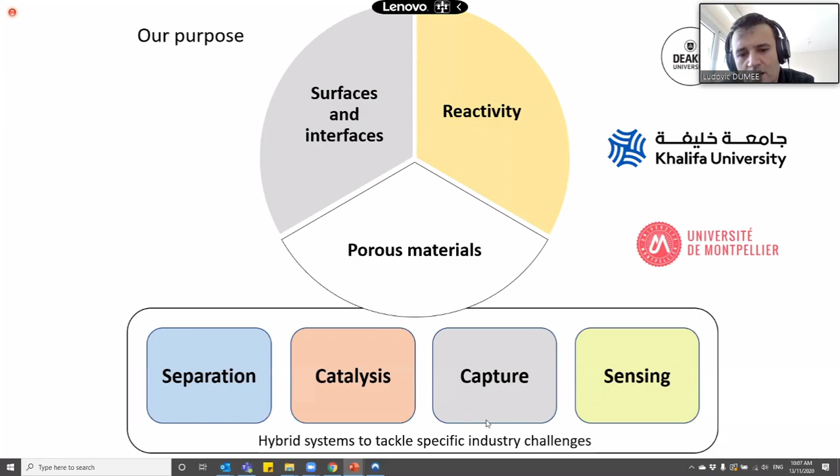where we can really engineer the architecture of these materials from a top-down type approach. In terms of specific type of materials or application, I'm not focused on anything in particular, because I typically go for a challenge, whatever it is, and try to find the best couple in terms of process and material to solve that challenge. But most of what we've been doing so far was in separation, membrane, and adsorption, catalysis, capture, for instance CO2, and a bit of sensing as well.

Recently, I have 3 different themes in Australia, and those are the 3 I'm going to continue in Abu Dhabi: healthcare materials, looking at cell sorting, hemodialysis, and microdialysis to extract specific markers in the brain; environment, where I'm going to show some stuff today mostly on nano and microplastics, as well as resource recovery; and obviously the material aspect, which I mentioned before.

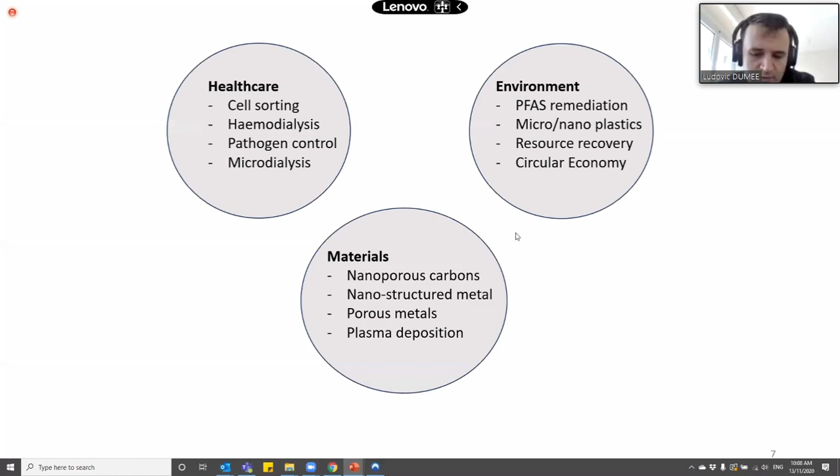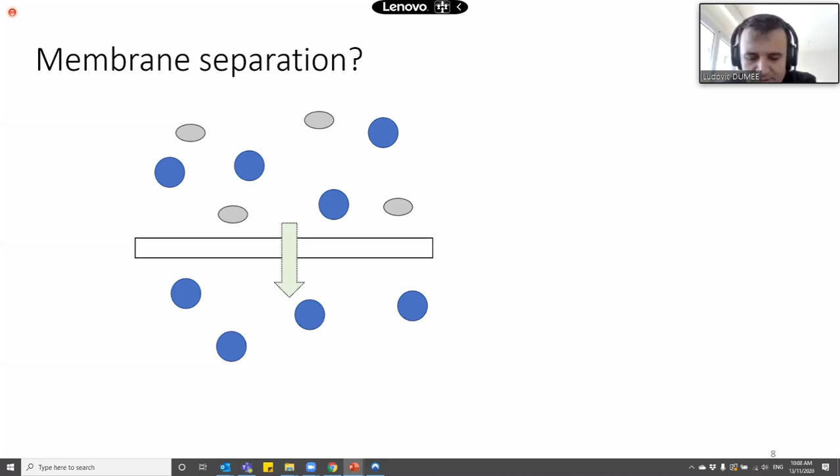Obviously, most of what I'm going to show you today is on membrane separation, so I want to make sure we all have a bit of understanding there, and I'm sure you are familiar with it, but just in case: a membrane, in fact, is nothing more than a filter. It has the ability to separate specific contaminants or resources or solvents from each other.

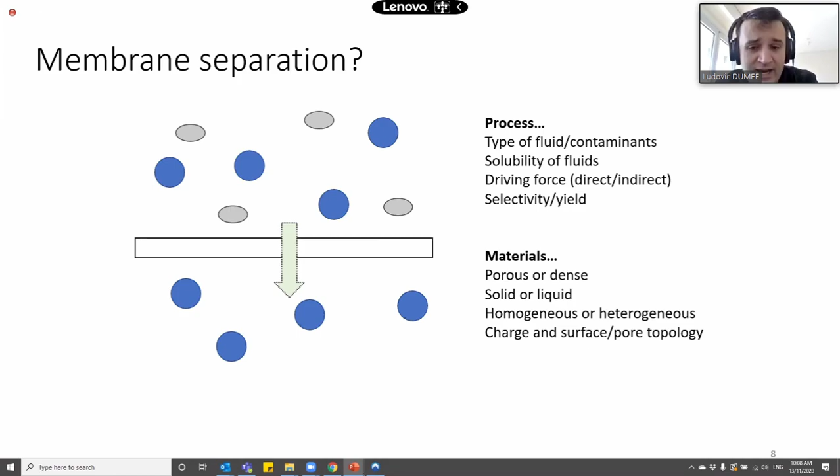And we have a number of different driving forces which will be applied across the membrane. These would actually dictate the selectivity, the permeability or permeance of specific compounds, and the yield of the reaction or the yield of the separation.

The materials that we can use to make such membranes, to engineer them, can be porous or dense, like I will show you today. They can be solid or liquid as well, and be made of a fairly homogeneous material, like a single polymer or a single metal oxide maybe, or it can be heterogeneous, like a composite material.

And again, you can imagine here, when you have such interaction between nanoscale molecules or mesoscale molecules and materials, you really want to control the topology of a membrane, the topology of the pores as well, in order to be able to engineer the interactions, in terms of charge and repulsions, between those contaminants and those surfaces.

So most of our work, again, is only on surface chemistry at the end of the day. We try to make holes in stuff in a controlled manner, and we try to make sure that we understand what surface energy we have on these surfaces.

These are probably the 6 main membrane separation processes which are available either commercially or at lab scale, depending. Reverse osmosis is the main one for desalination nowadays from seawater. Forward osmosis has found a number of applications as well in terms of industrial wastewater treatment, dairy, food, and so on. Membrane distillation is a very good technology, though it requires you to heat up the water in that case.

And the classical pretreatment systems like NF (nanofiltration), UF (ultrafiltration), and MF (microfiltration) are used currently in a very routine manner across a number of separation processes, from wastewater to healthcare to also pretreatment of chemicals, for instance. But really, these technologies are the core ones which we can find for desalination purposes, and they are very good.

But all of those only allow water or solvents to go through, in a sense. You will have some of the ions, some of the contaminants crossing at the same time, but they are more or less designed to allow for liquid permeation. And that's not always what you want. The two other technologies which actually allow you to capture contaminants directly or to capture ions are electrodialysis and capacitive deionization.

These two work based on the charge of a specific material, which has to be conductive in essence, and/or at least which can be either charged directly or which can allow for transfer or adsorption of specific ions. These will actually target those ions and not the water or the solvent. So we have a bit of a dichotomy between these two classes of membrane separation technologies.

Today I'm going to talk about UF for the microplastics and electrodialysis for the cobalt and lithium recovery.

Without getting into too much detail, obviously all of these technologies have a number of challenges and limitations, both from a process point of view, and some are inherent to the process, like fouling or scaling. You cannot do much about it. It has to happen because you concentrate something, and therefore you increase the stochastic chances to have specific adsorption and therefore strong adsorption between these contaminants and the membranes.

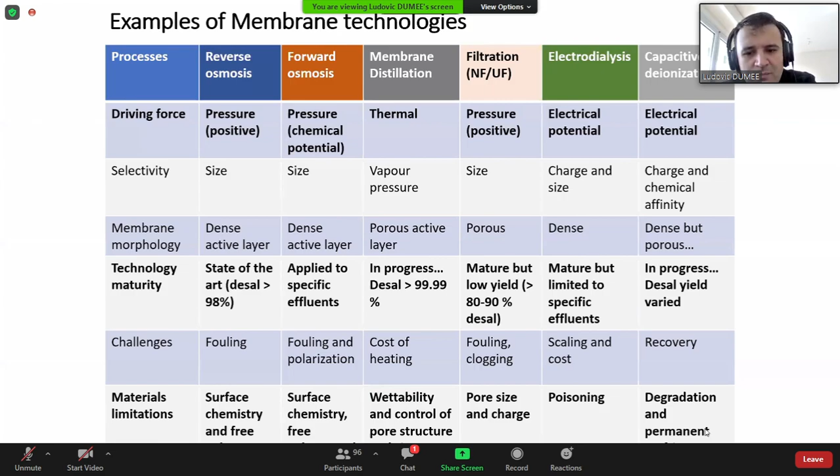So I guess this table highlights that these technologies are, most of them, very well matured. They are commercial, but they're not perfect. There are a number of applications that have been developed where things are well understood, but for a number of emerging applications with emerging contaminants, we need and require better materials and combinatorial processes to tackle those.

So what we have been doing for the last 8 or 9 years now is develop catalytic or responsive membrane reactors, which allow you to treat selectively some contaminants in that solution, or to degrade them, or to selectively capture them from a complex bath or complex mixture. We have been looking at biocatalytic membrane reactors, electro, photo, Fenton, and hybrids of those.

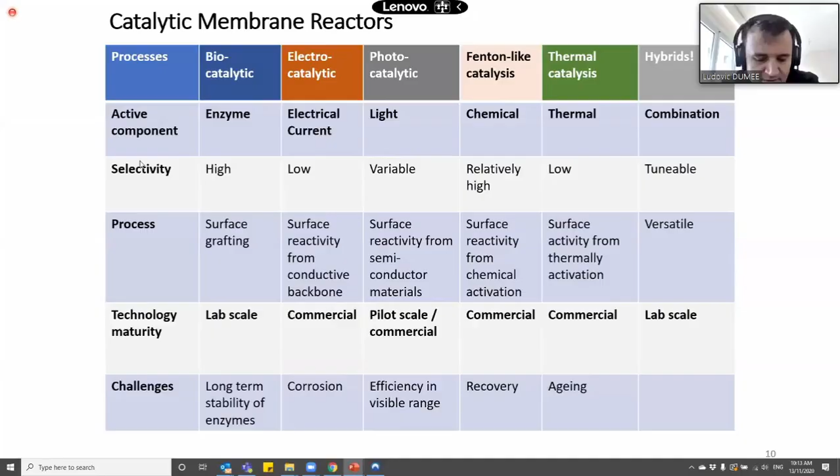The idea is that if we have a blend of ions, lithium, cobalt, and others, like I will show today, we can manage to force some of these through at very, very high selectivity. Because recovering water is always valuable, but there are often more valuable compounds in water.

At least with the concept of circular economy I'm trying to promote, I believe we should pursue managing these effluents in a much smarter way to achieve a zero liquid discharge type process, meaning we have an effluent coming in, we get the water out, and we get a number of products of value out of the brines being generated.

And if we can achieve this, that will not only reduce the cost of desalination, it will also reduce the environmental impact of these brines, which are currently released either in oceans or in sedimentation and evaporation ponds.

So it's trying to look at those processes I just showed before in a much more circular way and in a much more environmentally friendly way.

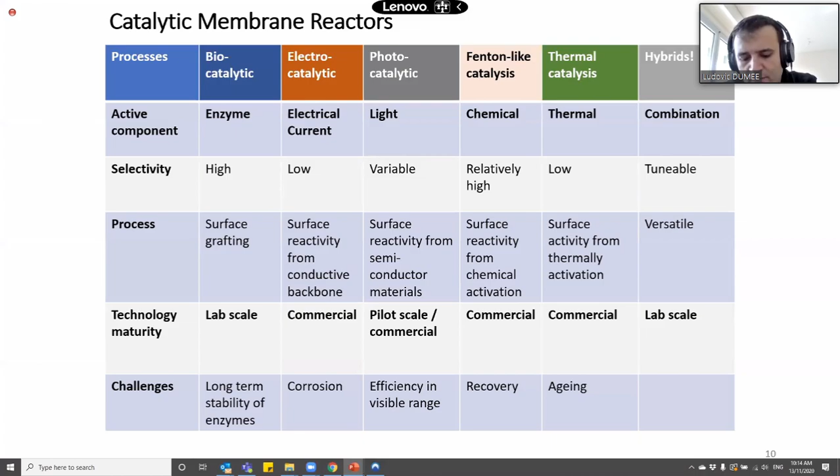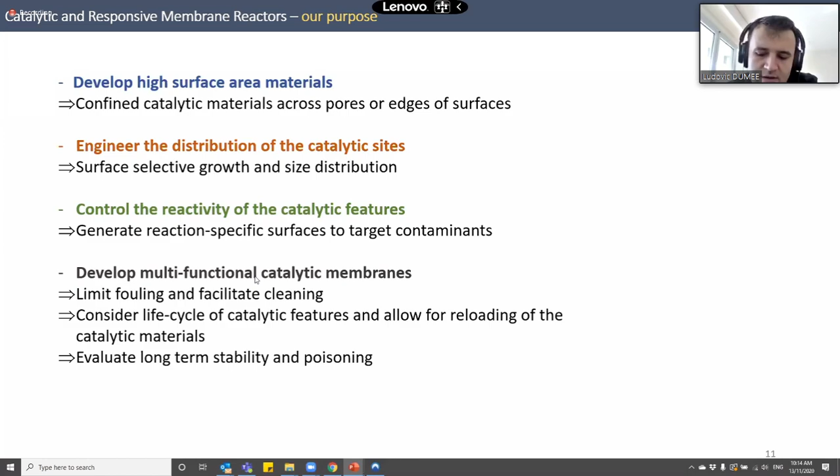Without getting into details, obviously we have been focusing on controlling materials properties in those contexts to limit fouling, to facilitate absorption, etc. I have probably 6 or 7 examples I could show you, but we'll just be focusing on 2 today.

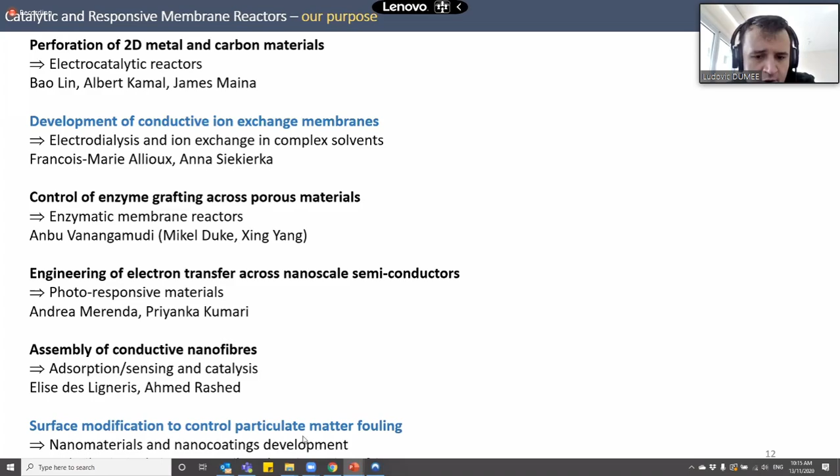The first will be the development of conductive ion exchange membranes for electrodialysis by tuning the properties of these membranes. The second is on the surface modification of ultrafiltration membranes to control particulate matter, microplastics, and fouling.

This work was really done on the battery spent effluent recovery by Anna, one of my postdocs. She's now back to Poland because of COVID again, but she left us in August, and she has been working with us for about a year, a bit more than a year, on that project.

The objective of this project was to see if we could develop again a membrane-based technology to extract selectively some of these compounds in the battery spent effluent.

Looking initially, because we have to make it economical, at lithium, which has a high value.

Sorry, there's a bit of background noise. Not sure if the mic is open.

And it is also extremely finite, so it's close to being one of these rare earth elements in those systems. We have to make sure we don't waste it, and we must be able to recycle and put it back into the loop. Besides the membrane aspect, I will show you some work we've been doing on using mixed solvent extraction at the same time as membrane separation to facilitate the kinetics of diffusion and the precipitation of these ions.

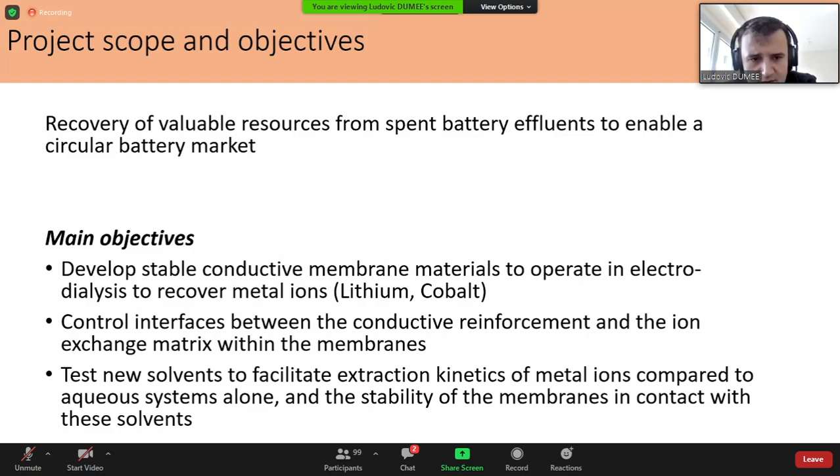So a bit of background there. This is for Australia, and I should get better numbers for globally or for Indonesia. If you look at the graph on the left-hand side, these are projections for the amount of waste of lithium-ion batteries in Australia, with three scenarios: low, best, and high level. Regardless where we stand, we're around 2020 right now, and we have about 10,000 tons, maybe 8,000 tons of waste per annum. But in 10 years' time, by 2030 or 2031, we'll have nearly quadrupled this, and it goes exponential afterwards.

Of course, this will depend on the development of new technologies, especially solid state batteries, which are happening. But even if those technologies come in, the amount of batteries, the volumes, and their capacities will increase as well, which means they will require more lithium, more cobalt, and more of these finite resources.

The cost of cobalt is on the order of $28,500 per ton at the moment, so it's quite valuable. In a battery like those, lithium ion, you can have between 0.1 to 1 to 8% maximum in the spent solution of cobalt. But if you look at those millions of tons globally of batteries being used, this still represents a large amount. Here it gives you an idea of a different share of compositions for the different main batteries, and you can see not all of those will include cobalt, but there is quite a proportion where there's a need to make sure we recover these elements.

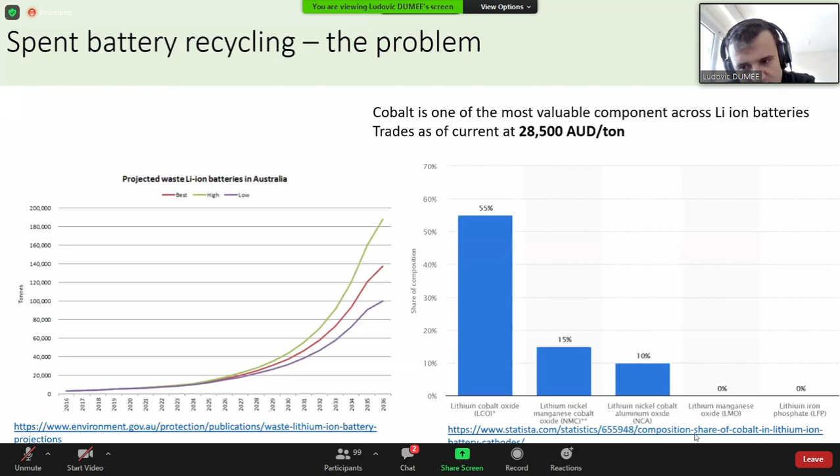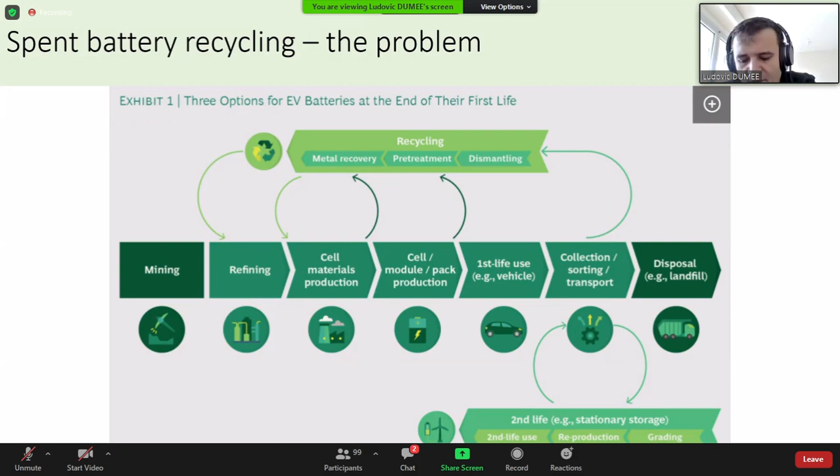There's a link at the bottom there if you're interested. That's a very good blog on resource recovery, focused for that article on batteries. I do recommend you have a look here. This article presents the different sources of components used to develop the batteries, and you can see if we want to make it circular, what kind of looping is needed right now to manage second life recovery of these products. I think it's really something we must strive for.

This shows you a bit of an economy of scale for recycling in China, a fairly recent piece from the same blog paper, published in July or August 2020. That gives you an idea of the total revenue expected, normalized by the energy cost, and also what can be done in terms of gross margin and direct margin.

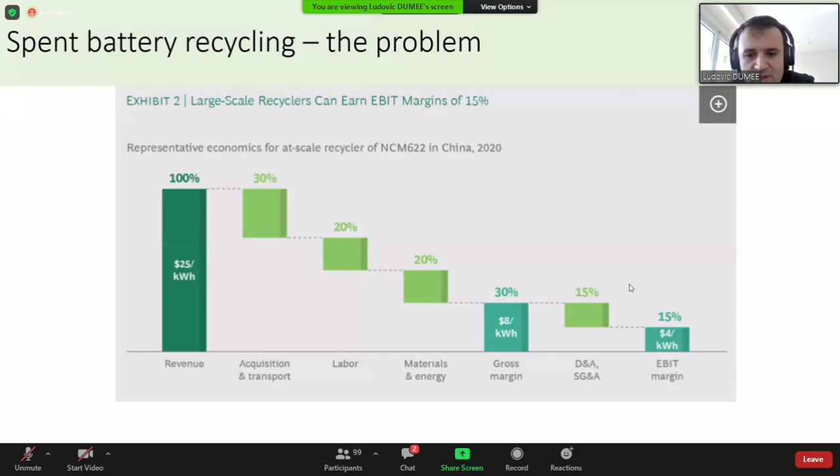I think it's important to realize the breakdown of these components across the board, because the labor component is not the major one here, which is often a reason why recycling is not done—most of these technologies currently made to recycle batteries don't require so much labor. The major part of the labor is required for the dismantling of the battery, not really for the operation afterwards. So all the rest is really operational costs from a process point of view, and these can be leveraged and reduced if you have an economy of scale happening.

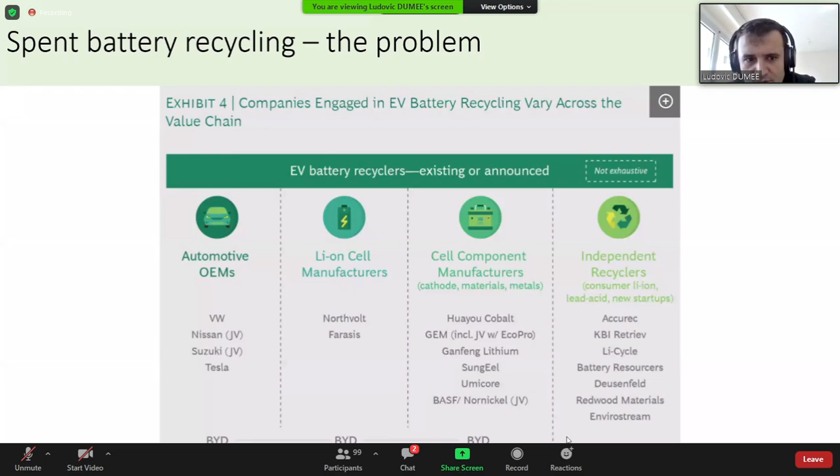You have a number of membranes with spacers between them to generate channels. Once these membranes, which come in couples with anion and cation exchange membranes, are stacked, you put them between electrodes, then apply a difference of voltage which drives a current, electron diffusion across the membrane stack, and therefore diffusion of ions from one side of a membrane to the other, if the membrane allows for that hopping mechanism of diffusion.

This has been demonstrated for desalination of groundwater, seawater, etc. But I wanted to understand how we could use that for lithium, cobalt, and other similar ions.

One thing that's pretty obvious is that these membranes have to be dense, because we don't want water diffusion directly. We want ion diffusion, often with a shell of ions around them, but it has to be limited to those hydrated ions.

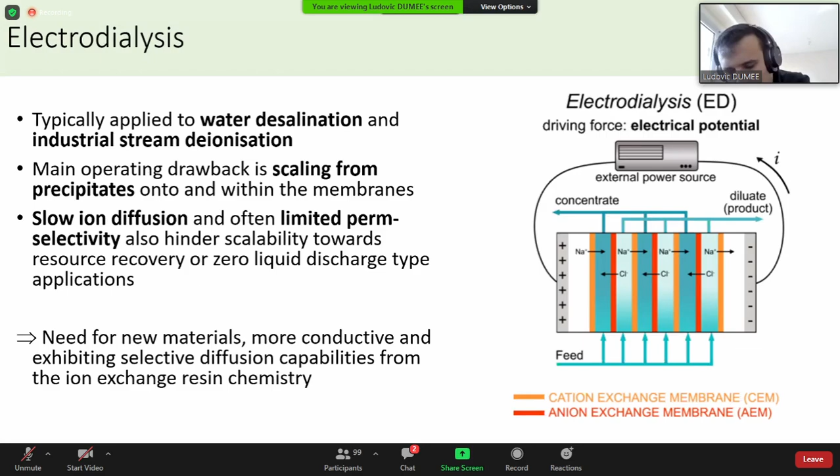So here, Anya really looked at two different strategies. On the left-hand side, she looked at the development of monovalent selective cation exchange membranes, because we only look at cation here due to the lithium and cobalt.

She tried to understand how we could look at partial dehydration of these ions, depending on the cation exchange models used. In a sense, what we wanted to understand is if we have pure water solutions or a mixed solvent, how that affects the hydration shell, and how that affects the diffusion potentially from the diluate to the concentrate side.

The second strategy she looked at is to develop cobalt selective membranes by a specific polymerization process between PVC, which is a typical base to make membranes because it's quite solvent resistant and stable.

And by actually looking at compounds called 5-chloro-8-hydroxyquinoline, which have been shown - because of the interaction between that OH and the tertiary amine functional group - to facilitate the encapsulation of cobalt ions. That was published by another group recently, a couple of years ago.

The idea was that they demonstrated it could be very selective for specific compounds.

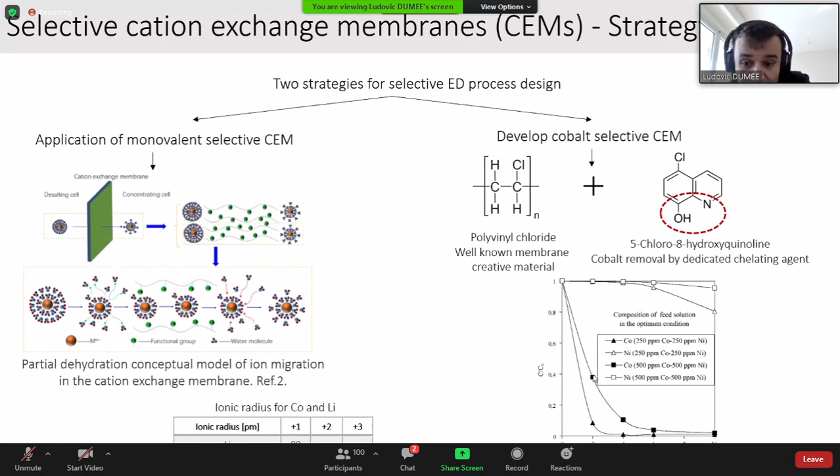So first, like I mentioned at the start, we try to control the morphology of membranes, we try to control the surface area often, and also the density, because we want them to be very dense.

Anya started from commercial membranes, Neosepta from Japan, and also made her own membranes, trying to control the surface morphology to facilitate diffusion and also to facilitate uptake.

Most of the time you want to limit the surface area of a membrane because you want to limit fouling - that's true for NF, RO, UF, MF type technologies. But in electrodialysis, you actually want to try to get more surface area to facilitate a higher diffusion rate.

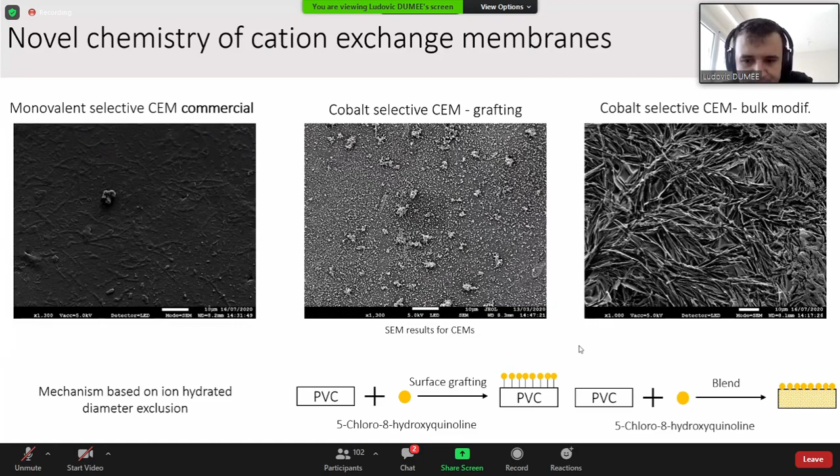This is important because to facilitate the diffusion of these cations, we want to have a membrane as negatively charged as we can, to some extent.

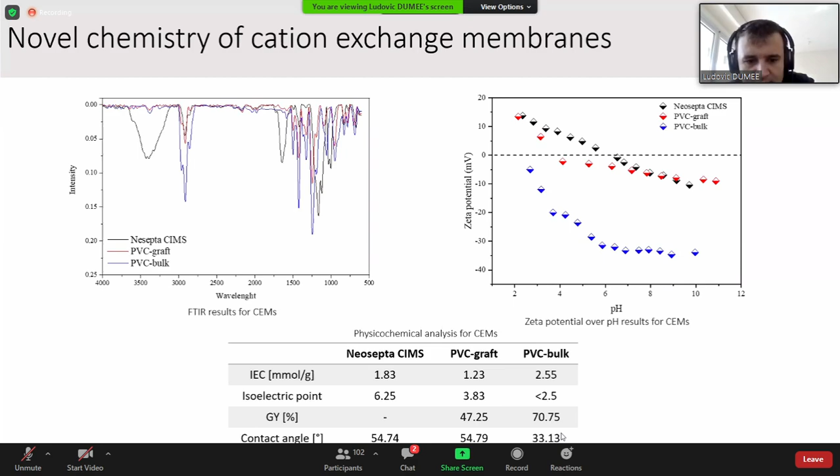So she made those modules and looked at the diffusion of different solvents, pure water in some cases, or with a deep eutectic solvent, the DES solvent I will show you afterwards. But the concept was the same otherwise. And she developed some membranes which were lithium selective, I didn't show you the chemistry, but it was done, and others which were cobalt selective.

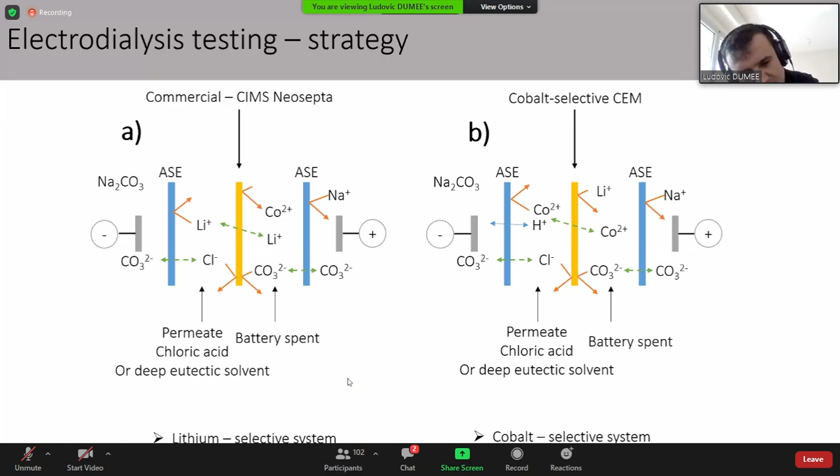That's interesting because this comes at the cost of the flux, if you look at the flux of lithium compared to cobalt. The interesting point is that by controlling the surface properties of the materials, you can definitely improve by a great extent the selectivity of these things.

If we really want to recover cobalt, such strategies can allow us to do so at a fairly cost-effective level, because the voltage across those stacks, with membranes about 50 millimeters by 50 millimeters, quite small, is quite limited—only 5 volts. In other processes used industrially, they have to go to much higher voltages to control the selectivity from the driving force, which we didn't have to do.

The second thing she did, or tried, was to look at these deep eutectic solvents. The idea here was to change the properties not only of the membranes anymore, but of the solution, to see if on the dilute side or the concentrate side we could manage to alter the solubility of the ions and also alter their ability later to precipitate selectively.

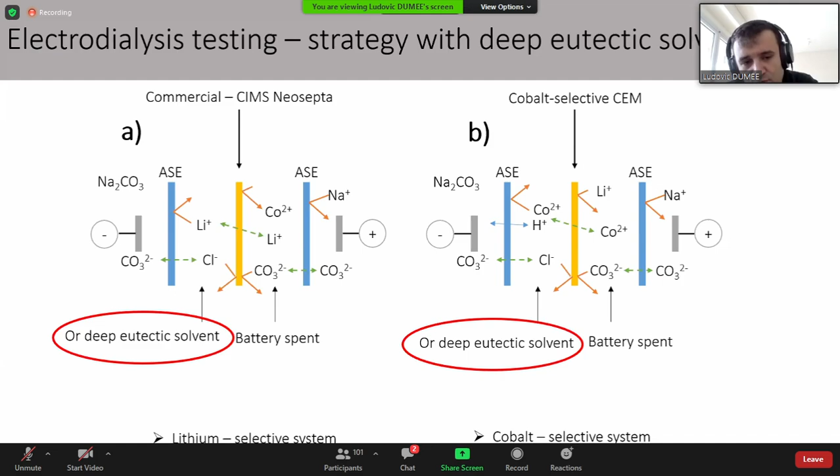She used a mixture of choline and urea, which is a known mixture actually used in carbon capture, CO2 capture mostly, and tried to understand the diffusion rates, the kinetics here for lithium and cobalt across the different systems at different concentrations.

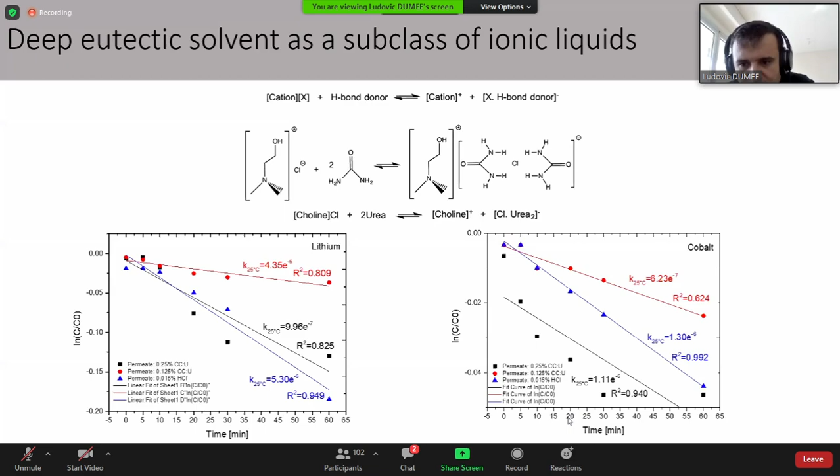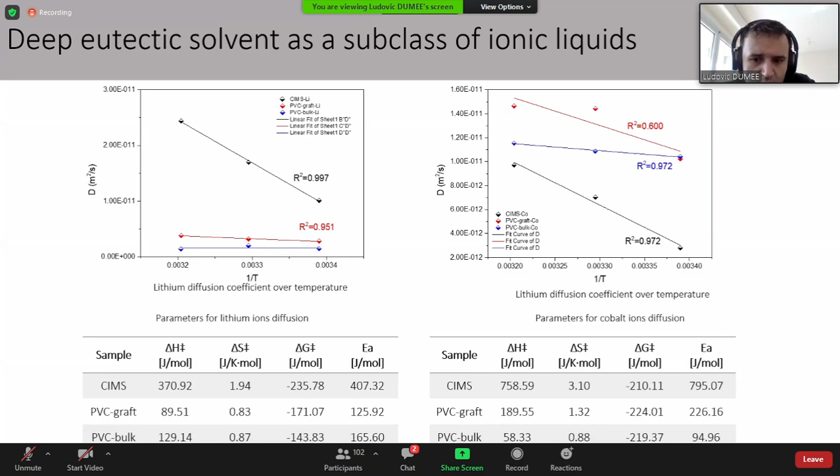If you look at these DES solvents as a subclass of ionic liquids, because people are looking a lot at selective extraction with ionic liquids, but they are very expensive and can have toxicity issues, the DES are much more stable, much less toxic, and can allow us, as you can see here, to capture much more of these ions compared to the reference water solution.

So she performed more tests with the same membranes and with mixtures of DES and water, and she managed to further increase the permselectivity for the PVC grafted membranes. She nearly doubled them compared to what she had before.

Generally speaking, even for the reference membrane, it looks like the impact of the solvent was beneficial to the diffusion, and the solvent actually favored the desorption of cobalt from the membrane, because we have nearly a factor of 5 here, and here a factor of 2.

This is not true for the PVC bulk though. You can see we have less than we had before, because we had around 26. That's likely related to the fact that the PVC bulk modified, which had more monomer in it, had a greater uptake of the DES solvent.

So the diffusivity of the solvent was too good in the membrane here, and over here, it could not diffuse far, just at the interface. Here, the membrane captured the solvent, which prevented diffusion of the ions.

This paper was submitted a few weeks ago, but if you have questions or are interested, we can further discuss.

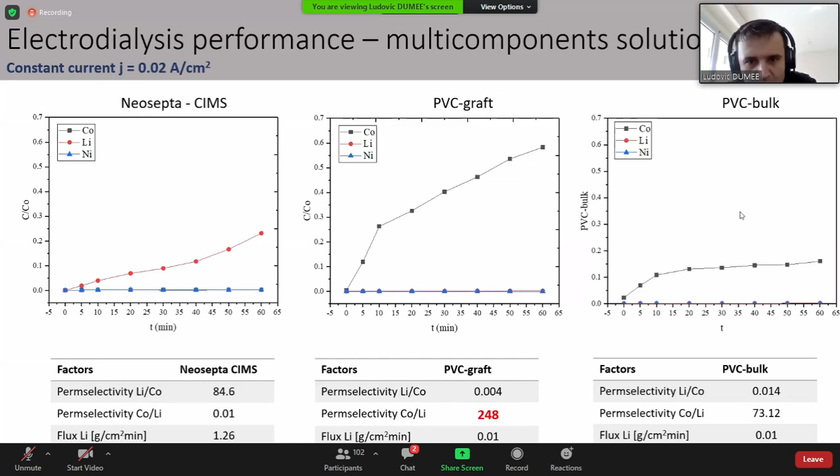And this graph actually relates to that directly. That's looking now at constant currents as opposed to constant voltage, but we had similar permeation and similar behaviors. So I won't go into this, but in a sense, those PVC grafted with the monomer grafted on the surface were always better compared to the others.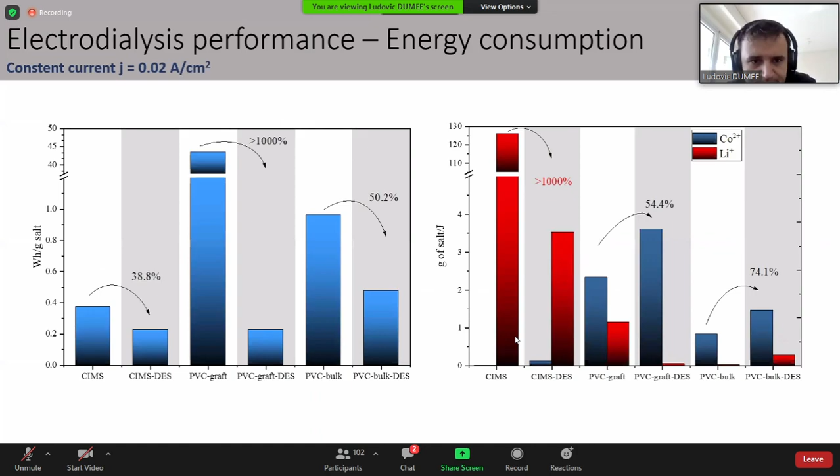And she made similar calculations there.

So in conclusion for this first part, what I want to say is that there is a lot of work to be done on the material side to further improve these concepts, and that if we want to be selective, if we want to have highly efficient systems, we need to rethink the way we do things, because often people want to be fast and have great selectivity, and that's not always possible.

Now we are touching limits of thermodynamics, and also if you have fast flux of different components, it often leads to more fouling, to more detrimental effects on your materials and on your membranes. So I think we have to accept the fact that we need to be slow for some things, but we need to be able to do it extremely selectively.

And if we do so, like I showed you for some of these examples, the economics follow. So there is great potential to pursue that circular economy aspect, not by always trying to be efficient, but in the sense that we need to be selective to get a product nearly pure out of a single process.

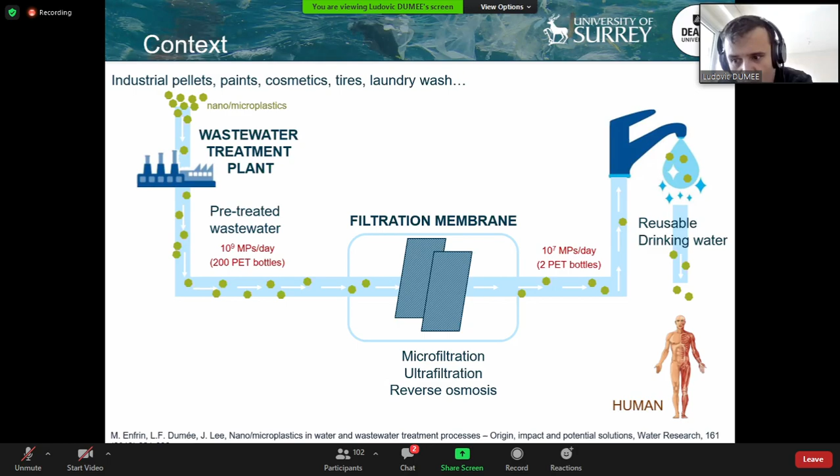Would they not do anything at all? Would they increase fouling, or would they damage the membranes, for instance? So we looked at a number of things, focusing on one single type of membrane, and how we could modify it to control the surface charge.

That's always my approach: to understand, if fouling occurred, what we could expect. Typically we expect lower flux and higher rejection, but also a shorter lifespan of the membranes. And if we have to clean them, that further reduces membrane lifespan. So we get into a vicious cycle of keeping performance high in terms of flux but losing material integrity, and increasing operating costs at the same time.

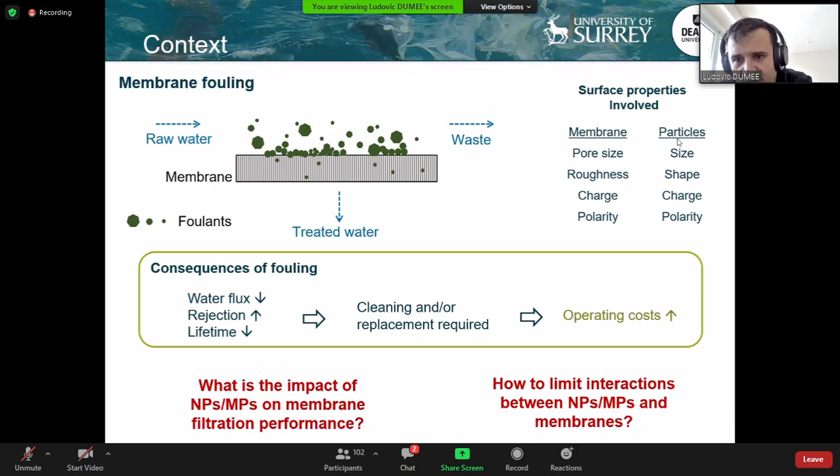So we wanted to understand if we change the shape, size, charge, or polarity of the particles, how that would affect patterns based on the membrane properties. I'll show you two things today.

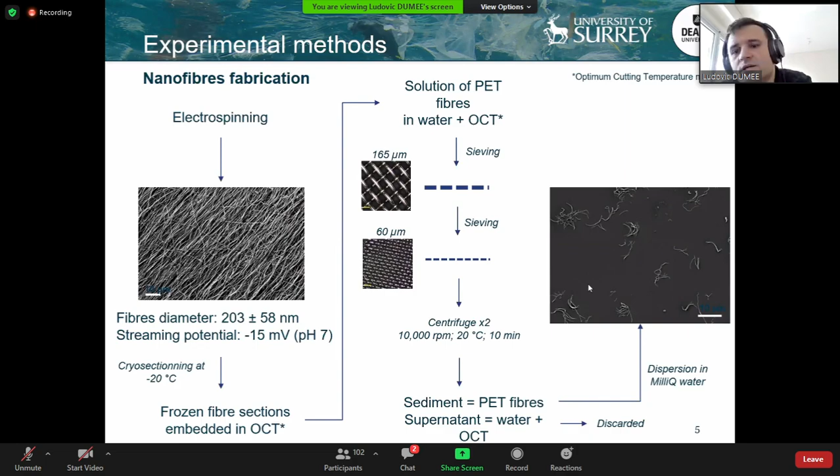The first is how we synthesized short nanofibers. We used electrospinning to make aligned, or fairly aligned, fibers, with a diameter around 200 nanometers and a length of roughly 5 microns. After a specific set of treatments, we looked at how we could isolate them to use as a feedstock for our filtration processes.

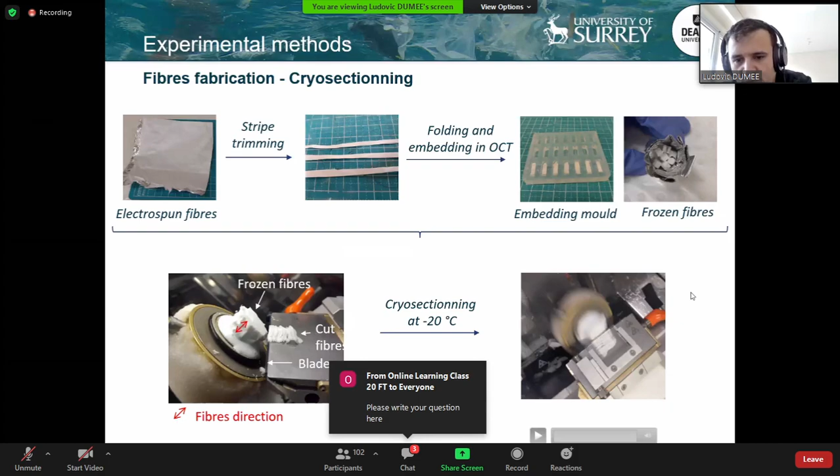That's, in a sense, how she made it. I won't go into the details, but she spun the fibers, cut them, used a material to freeze them, and then cut them down with a microtome to get very thin slices. The video of that process is too noisy to show here. We also had to characterize these fibers to understand if we could remove the freezing material, and to determine the concentration and levels we had in solution.

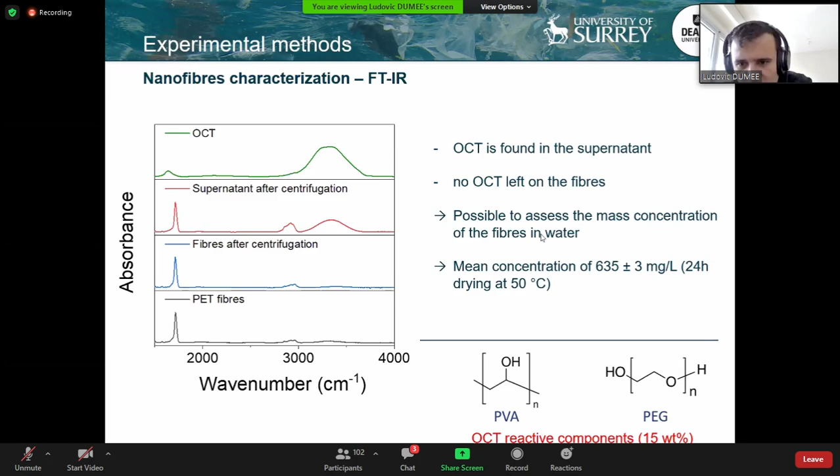So the first material we synthesized ourselves. The second material we used is actually microplastics from a face scrub, which is no longer for sale. But when Marie started her PhD four years back, you could buy it off the shelf in the UK. It came from one of the major supermarket brands, and she bought ten of them, which was enough for her whole PhD.

In those face scrubs, up to 2.5% was plastic—a massive amount when you think of the tons, or megatons, that have been sold to people over time. Some of the microplastics we found ranged in size from 10 nanometers to 700. I really wonder what happens when you're below 100 nanometers, in terms of uptake by cells, by the skin, and so on. This is a health issue.

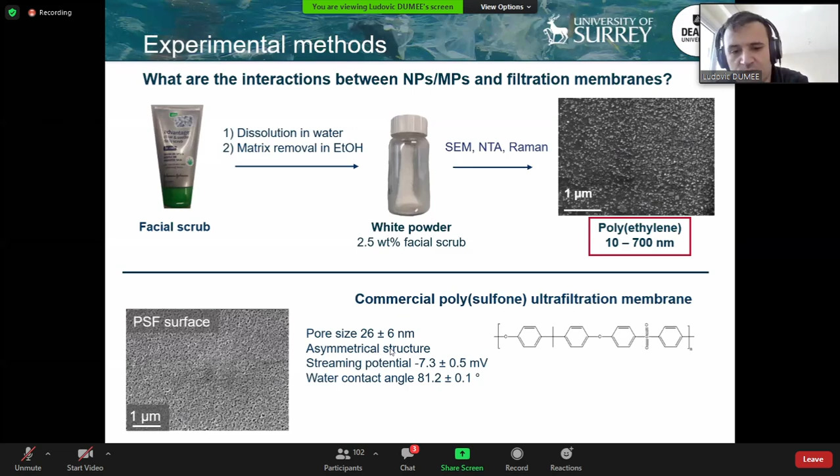The pressure differences here were quite low. We were around, I think, 1 or 1.5 bars, so not high transmembrane pressure, and the impact at those concentrations, which could be arguable, but is yet quite dramatic.

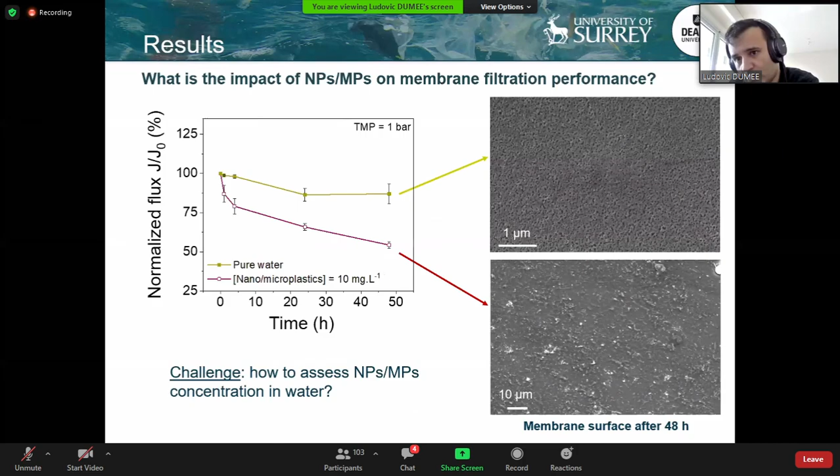But how do we go from seeing that on the surface to understanding how much particles are on the surface, or are still in the liquid, in the effluent, after crossing the membrane?

So we use the technology called the nanoparticle tracking analyzer, NTA, which is fairly recent. The first units were commercialized about 10 years ago. And it works a bit like DLS, except that the algorithm is quite different.

There is a laser scanning a microfluidic chip, which we have a cross-section here, and it will scatter light around those particles. The scattered rings of light around the particles will allow you to determine, with the right algorithm, the particle size distribution.

The software is pretty smart here because it will take a video of whatever goes through that microfluidic chip as the particles circulate, and it will track each particle individually to make sure it's not counting them several times. That's important because it allows us to get size and number distributions of the same sample.

The main challenge here is that it has to be fairly concentrated. We need at least 10 to the 6 particles per milliliter to work, so that's a challenge. The second challenge is that this is good for nanoparticles up to a micron. It doesn't work for anything larger.

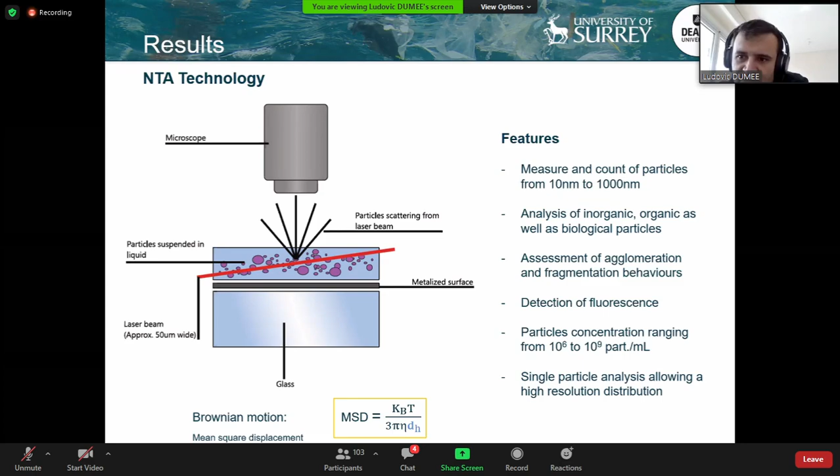But like I said at the start, most of the work to date has been done on microparticles, not on nanoparticles. So by doing so here, and because of the range of particles we saw, it was still relevant for our study. When Mary prepared the fibers or the particles, she made sure she had nothing larger than a micron in terms of particle size, by having a prefiltration step to only consider those nanoplastics.

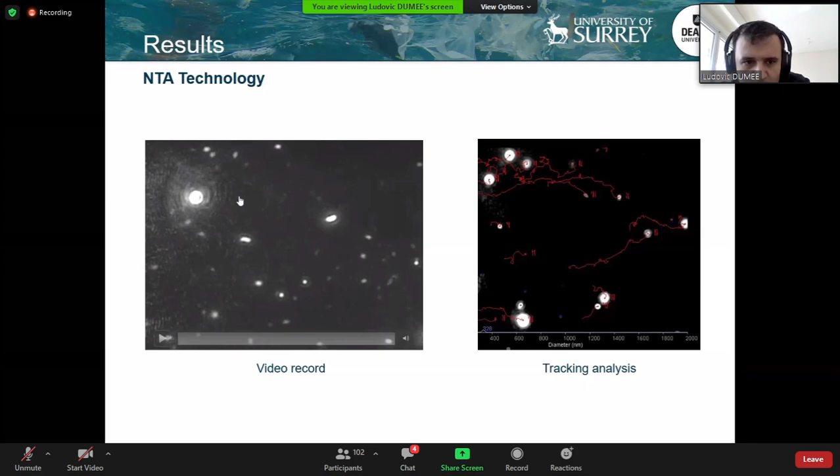So just a quick video here so you can see the particle moving in the microfluidic channel. On the right-hand side, you can see the track of each particle - that's a snapshot there, so the software knows where they are. If they overlap at some point, it doesn't count them twice. You can see those scattering rings around them, which correlate back to the size of those particles.

So what are the interactions we can expect between those particles and the membranes? I'm conscious of time, so I will go through this quickly.

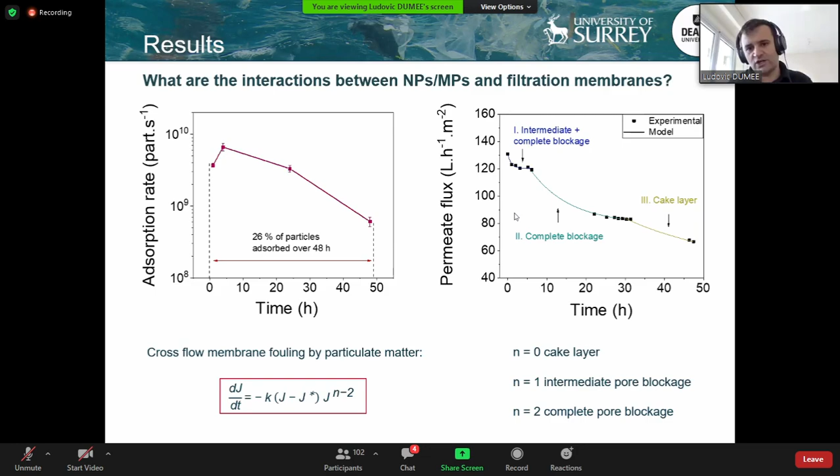Mary calculated the amount of particles being adsorbed on the membranes and related that back to the different pore blockage and cake formation mechanisms. There are three of them: intermediate, complete, and cake. If you have questions on those, I can take them further, but she has been doing some modeling to understand each part of the curves where we're standing here.

In essence, what we found is that we had a quite large contribution of complete pore blockage, meaning some small particles were getting inside the membranes and blocking the pores completely. And obviously, like we could see from the SEM, we had cake formation. But the intermediate pore blockage was not found to be significant in terms of behavior there.

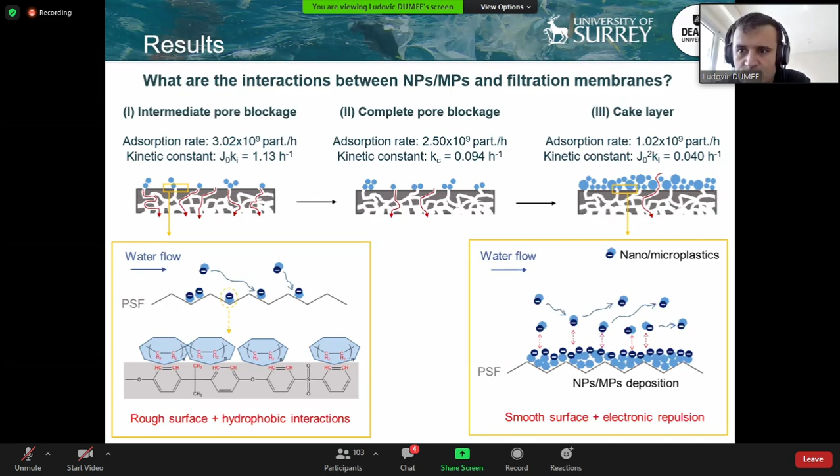Those solutions were quite basic, quite simple - just microplastics in water. And now we are doing tests where we complexify by adding surfactant, by adding other things, to see how we can come closer to real wastewater.

The second thing she's done is to look at the nanofibers. Like I mentioned at the start, you can have a few hundred thousand to a few million fibers being released per wash. That depends on the capacity of the washing machine and many conditions, but which corresponds to a mass of nanofibers released between 2 and 10 milligrams per liter, depending on the reports. So it's quite decent in terms of concentration here.

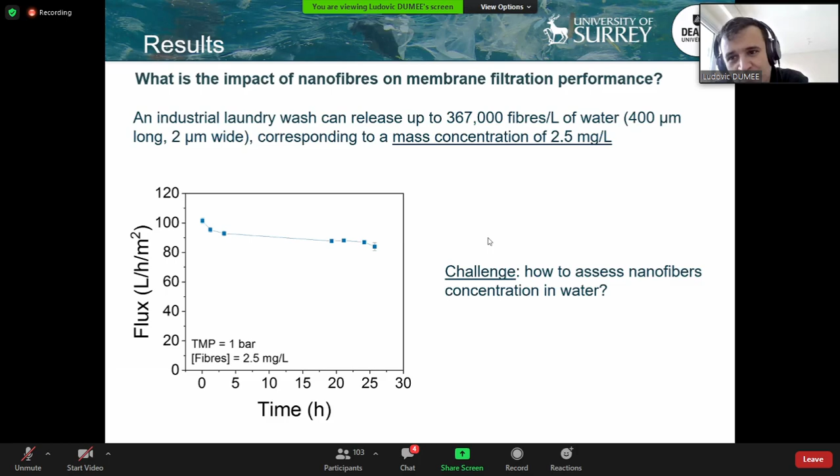The challenge we had here is that we could see the fibers, but we could not use the NTA because of a scattering issue to determine them. So we used basically the turbidity of a solution to calculate that, with UV spectrophotometry. That allowed us to get an idea of the transmittance at different concentrations to calibrate our system.

So it was more indirect, and we could not get size and concentration at the same time. Because the fiber length and diameter were very controlled, we had very little variation there, so it was not as important for the fibers.

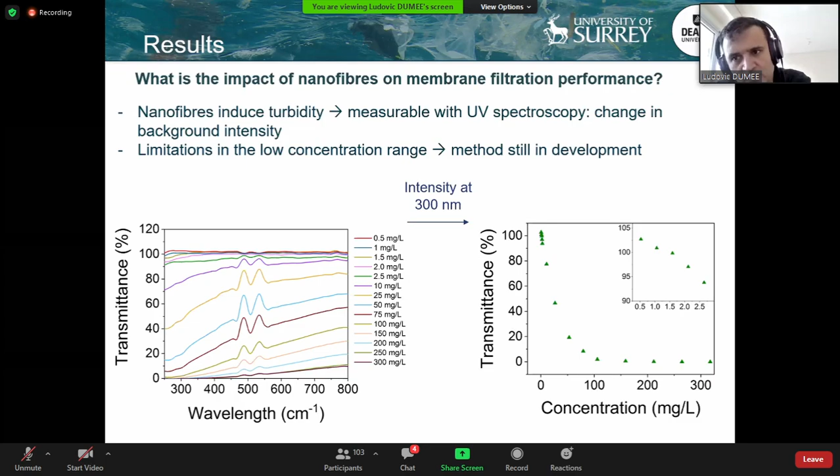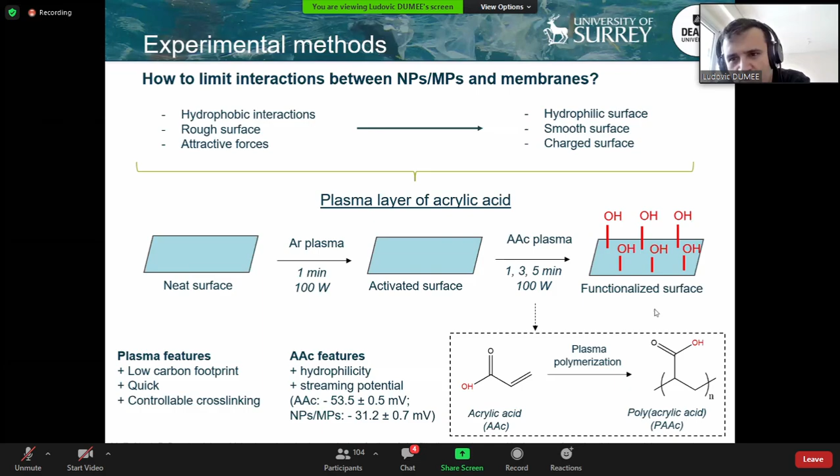In order to control these interactions and limit fouling, Mary used plasma polymerization with different monomers, but I'm only reporting for acrylic acid here, to modify the surface and make the membrane a bit more hydrophilic, more wettable, which often makes it easier to clean.

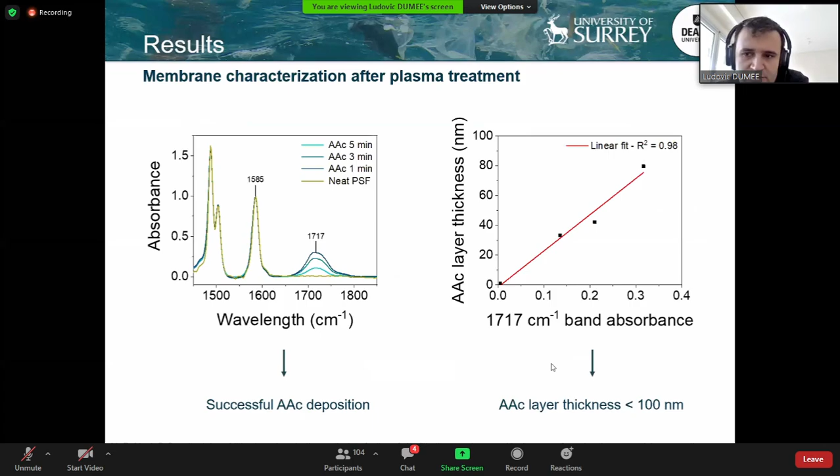So we densify the membranes a bit as we add the layer, but again the purpose is to control the charge, so we have to compromise somehow.

Interestingly, if you look at the data, same graph of normalized flux over time for 48 hours, we had similar decay, but much less decay for the membranes polymerized for, say, 3 and 5 minutes, meaning less interaction between the particles and the membranes.

When she calculated the amount of particles absorbed after 48 hours, we had much less particle absorbed on the membrane, about 10 to 12% compared to 30% for the unmodified membranes.

So going in the right direction, but this comes at the expense of the absolute flux of the membranes, because we are reducing altogether between 20 and 40% of the pure water flux due to the plasma polymerized layer. But we have to move back from always making things faster, and agree sometimes on making things a bit slower but more efficient.

That's my motto here. After cleaning, with just a basic water cleaning, she could recover quite a bit of particles from the membranes, close to 90% in a sense. For the 1 minute sample, not so much, which tells us we probably have a patchy coating.

The PSF is still present, it's not fully covered, therefore it didn't release everything. But at 3 and 5 minutes, the release was very good.

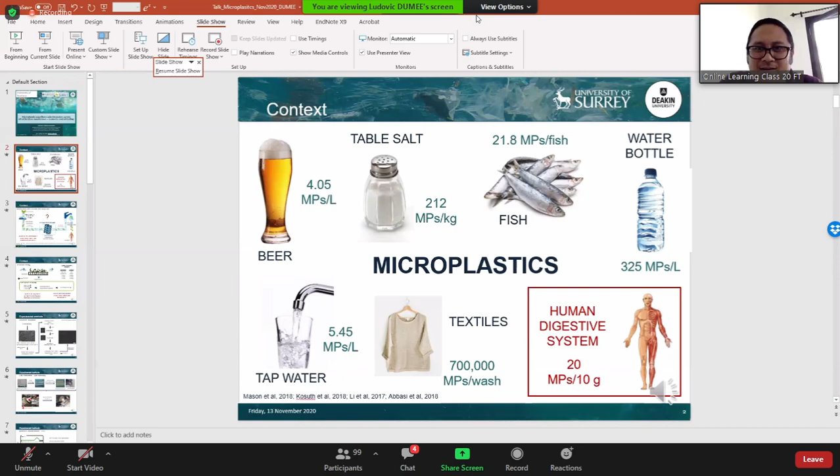You can raise your hand here. Don't be scared, I can't bite you today because I'm not on site. So...

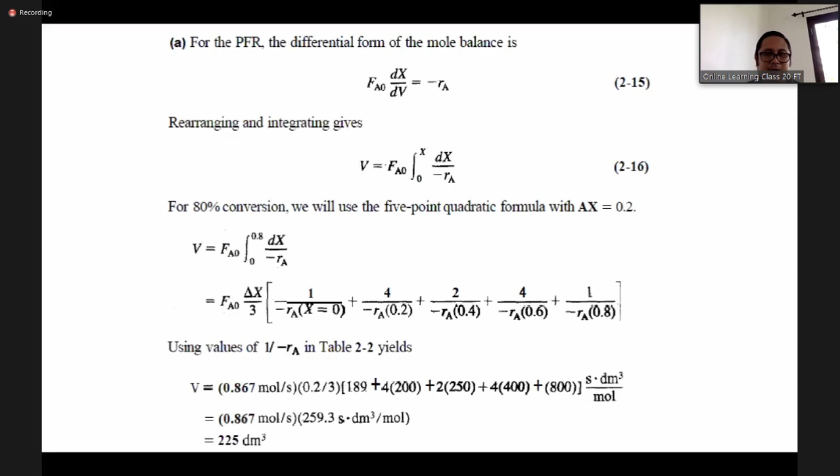Jadi kalau kita bandingkan misalkan satu reaktor CSTR, langsung kita gunakan untuk mencapai konversi 80%, kemudian kita bandingkan dengan menggunakan 2 reaktor CSTR, di mana konversi akhirnya sama-sama 80%, tetapi konversi intermediate-nya atau konversi yang keluar dari reaktor pertama adalah 40%, maka kita lihat total volume reaktor yang dibutuhkan adalah ternyata yang reaktor CSTR seri itu membutuhkan volume reaktor yang lebih kecil dibandingkan dengan kalau kita menggunakan satu reaktor CSTR yang langsung mencapai konversi 80%.

Jadi artinya untuk kasus ini kita berkesimpulan bahwa reaktor CSTR seri itu lebih ekonomis dibandingkan dengan menggunakan satu reaktor CSTR tunggal.

Kemudian pertanyaan berikutnya, dengan menggunakan data yang sama, kita diminta untuk menghitung dan bandingkan volume total kedua skema reaktor seri di atas jika diinginkan konversi intermediate-nya adalah 50%. Jadi diketahui X2-nya 0,8, sama-sama 0,8, tetapi X1-nya adalah 50%.

Maka yang kita lakukan adalah kita coba bandingkan, kita hitung total volume di skema yang A, kemudian kita bandingkan dengan total volume untuk yang skema B. Nah, untuk skema A itu yang pertama adalah reaktor PFR, diikuti dengan reaktor CSTR, atau kalau kita gambarkan dalam skema yang ada di kurva laju reaksi versus konversi, itu bentuknya seperti ini.

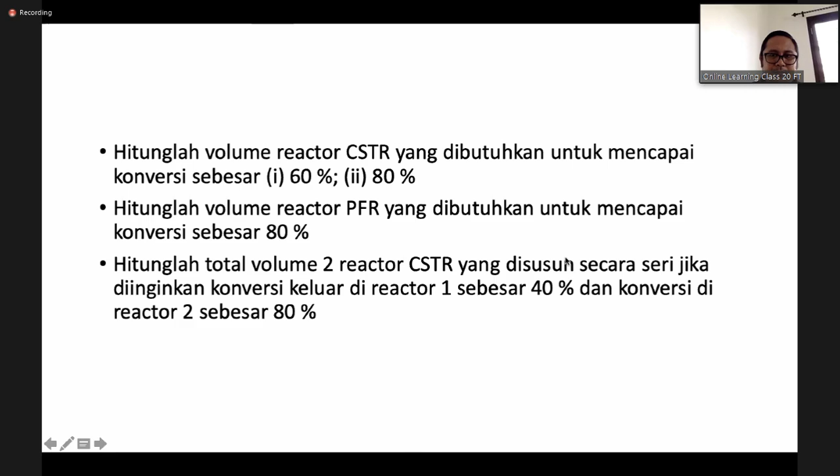itu ada kemungkinan volume total reaktor yang dibutuhkan itu akan bisa membalikkan keadaan. Tadinya yang skema B volumenya lebih kecil, mungkin saja untuk konversi intermediate 40%, maka skema A bisa saja memberikan volume yang lebih kecil.

Sehingga di sini ada kesimpulan bahwa ukuran relatif dari reaktor, jadi volume reaktor itu sangat tergantung pada konversi intermediate. Jadi artinya kalau pada reaktor seri seperti ini, maka posisi dari X, terutama X1 atau konversi intermediate, itu sangat menentukan total volume yang kita butuhkan kalau kita menggunakan reaktor yang disusun seri.

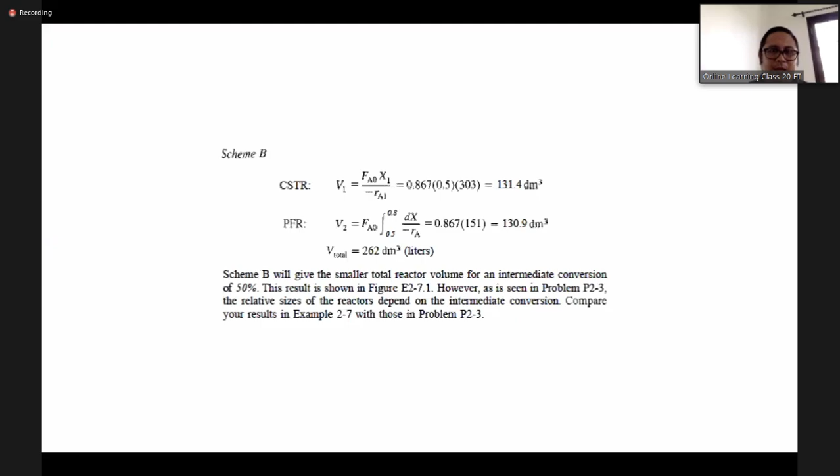Jadi kebetulan dalam skema yang lebih kecil, walaupun sesuai dengan kesimpulan kita minggu lalu, ini seharusnya yang duluan adalah yang PFR. Jadi artinya di sini selain kesimpulan kita minggu lalu, kita bisa menyimpulkan juga bahwa posisi dari konversi intermediate atau konversi yang keluar pada reaktor yang pertama ataupun kedua, kalau misalkan susunan reaktornya ada 3, maka posisi dari konversi intermediate sangat menentukan skema reaktor yang akan kita pilih.

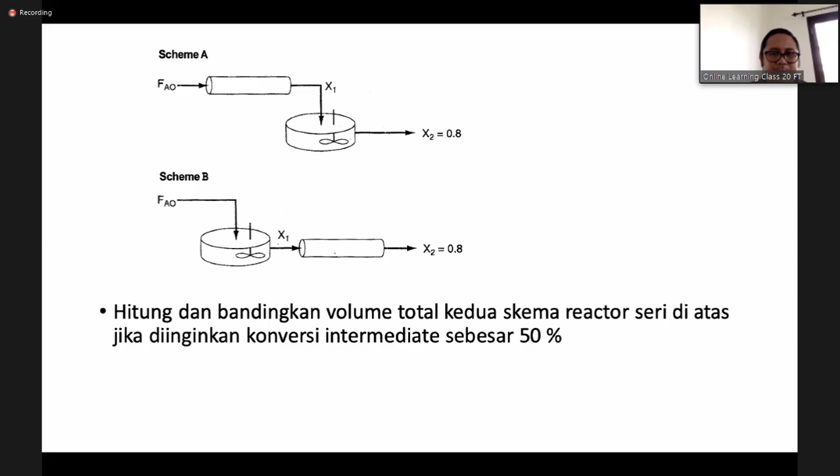Jadi sebaiknya kita lakukan apa? Yang kita lakukan adalah kita langsung menganalisa dari kurva laju reaksinya.

Nah, kemudian berikutnya kalau misalkan kita punya skema seperti ini, ada 2 skema. Satu CSTR, kemudian diikuti PFR, sementara yang satunya adalah PFR diikuti dengan CSTR. Kemudian kita punya kurva laju reaksi bentuknya seperti ini, jadi ada nilai maksimum, ada nilai minimumnya di sini.

Nah, pertanyaannya adalah kalau kita punya sistem seperti yang ditunjukkan oleh gambar ini, ada CSTR, ada PFR, kemudian diketahui konversi intermediate-nya 0,3, kemudian konversi akhirnya adalah 0,7. Bagaimana seharusnya reaktor itu disusun supaya menghasilkan volume total yang minimum? Jadi konversi intermediate-nya adalah 0,3 di sini, kemudian konversi akhirnya adalah 0,7.

Jadi tanpa melakukan perhitungan kita bisa melihat bahwa kalau kita misalkan menggunakan CSTR di seri dengan PFR, maka kalau CSTR-nya yang posisi pertama, artinya di sini X1-nya 0,3, maka di sini volume CSTR-nya adalah ini. Ini kita tarik ke atas sampai mendekati puncak, kemudian kita hitung luas area persegi panjang.